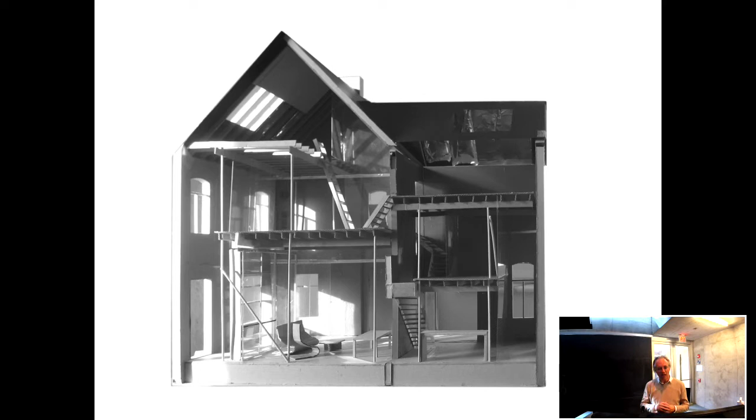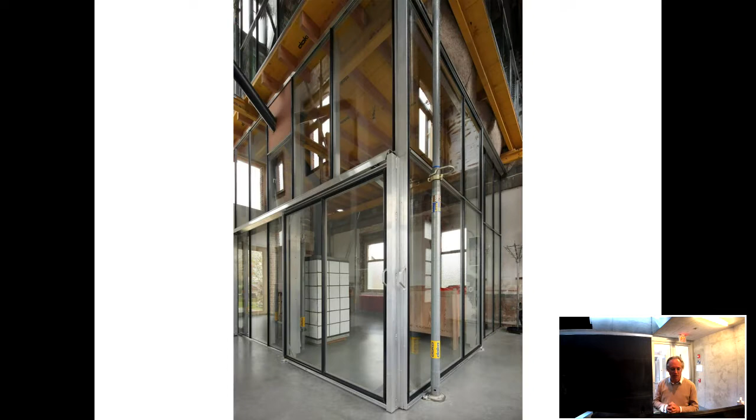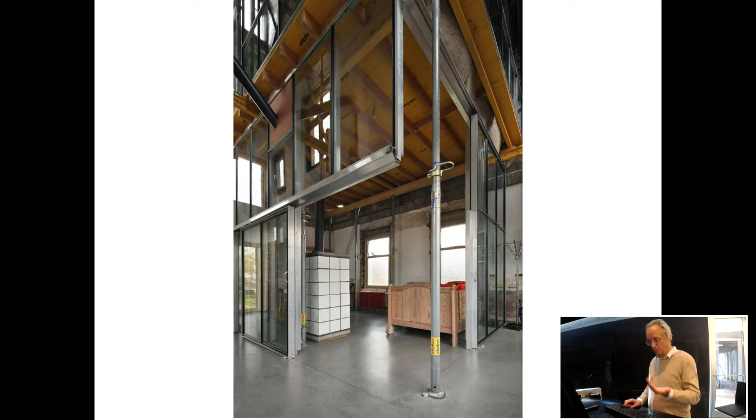It's also winter when you want to have more space or when you want to profit of the light around. This is the space. All existing floors have been taken out and a new glazed house came in between. What you see in between is in fact a huge, almost 1 meter space of air helping to change the climate of the house.

No insulation on the outside, but just the fact that there are two climates into the house. Of course this is very attractive to talk about nowadays, because we are all in this thinking of climate and sustainability, and we should be. But on the other hand, for us, the message is slightly different.

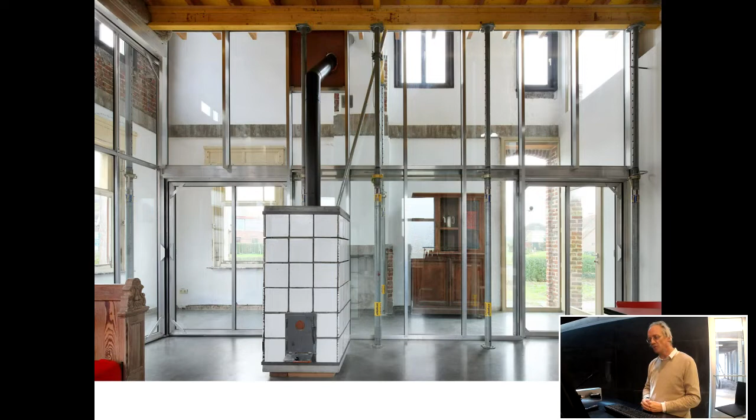We wanted to keep thinking about the idea of how to live in a house. This is the image I like to stand still with for a moment. One has a chimney. Maybe the chimney was not really needed, but at the end, in the winter, it's really nice. And the position of the chimney towards the old chimney is almost merely in my interest.

Instead of keep on repeating that it has its advantages in the way of climate, in the way of energy, and so on, for me it has mostly the advantage that it is another way of living in a house, and on top, a way of living in a house that could be built by the family themselves.

I show these images because for me, architecture is of course a message of form. We need to make things, to give things form, but at the same time, architecture is also a message of life. In the meantime, the kitchen has been changed without the architect, and I think it's a very good message in that sense.

But look what it is about. It's about living in it in a certain way, simple, decent, but everything available. We walk up to the bathroom, but there is something else in the house, and this image is a little bit unsharp, but it doesn't matter maybe.

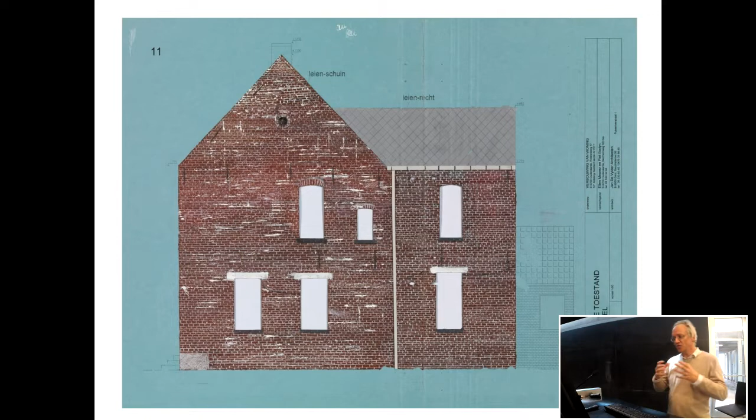It's about one facade of the house. As you've seen, the house is totally loose. The new glazed house is totally loose from the old house. But on one side, we needed to touch the outside facade, and then, of course, one has to insulate to do energy savings.

This is a drawing that represents, a little bit fuzzy, the photo from before, the image from before. And it represents the beauty of the old facade of brick layers, these old bricks that has been there for centuries, and walls that have been washed out a little bit, and the beauty of it.

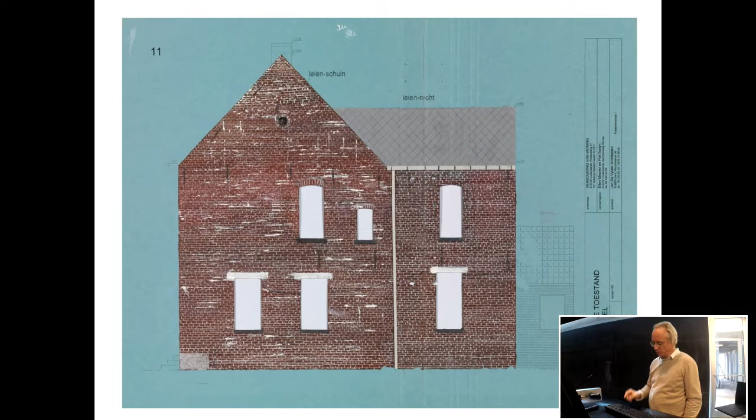Finally, we covered it with insulation, as we should do, but we covered it also with, in my opinion, nice cement tiles. But on those cement tiles, we added a drawing. Because with the client we talked, and of course one needs to have a good understanding with his clients.

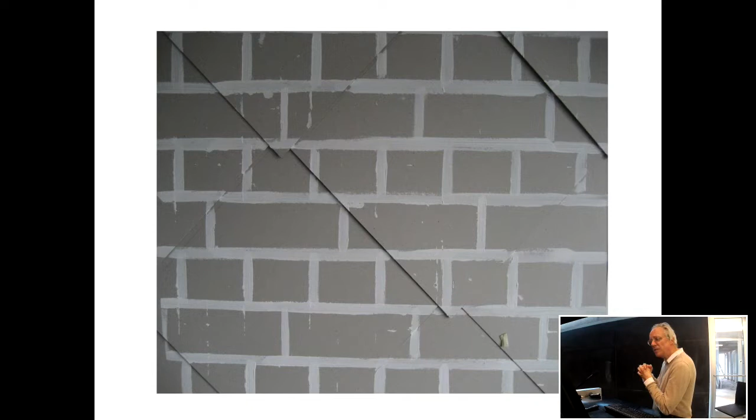With the clients we talked and we said, well, wouldn't it be nice that maybe next to all the things one has to do to create a house, we also might think about things that are not really necessary, but that are maybe about what architecture also could be.

And we together developed an idea of redrawing the idea of the brick wall on the tiles. What an effort for nothing. But to us, an addition to what architecture also could mean.

And of course, what you will see there, not everyone will see it. But then, the moment it comes into your eyes, it opens your thoughts. What's this? What is it about? Who has done it? What is the message? We believe that in architecture, and even especially in these days in life, we can rediscover meaningless things that at the end might mean a lot for a lot of people, and all in different ways.

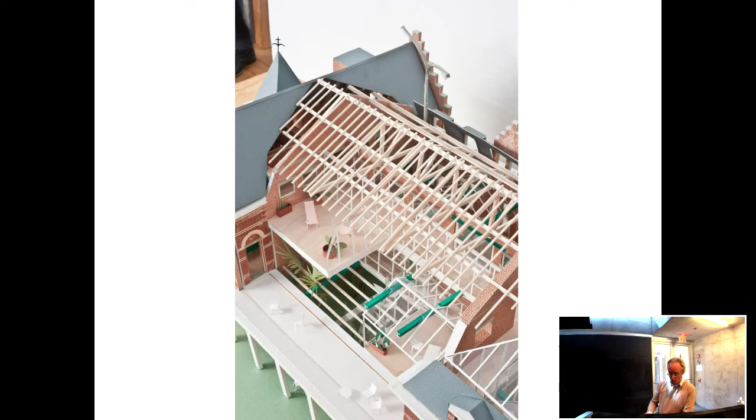And the model we used not only to explain the project, but also to explain our attitude by saying, listen, if we accept this job, or if you accept our proposal, we want to go for a long-term talk. Because at the end, your question was what can we do with the building? Advise us - if we can't do anything with it, then we demolish it. But the question had no program, no idea, and the question to us was how to react with the building, understanding that you were looking for new understandings of space and architecture.

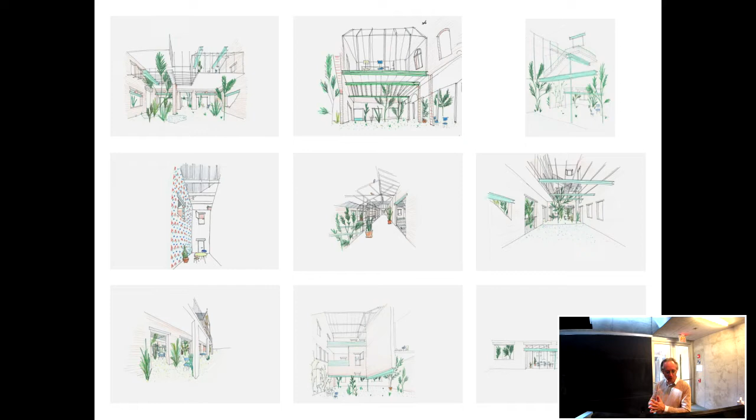And psychiatry. So we said, if you allow us to be your partner, we will serve you with models and drawings, explaining how space can evolve, talking not only with your doctors and therapists and practitioners, but maybe also with those who live there - to arrive at the idea that our participation in this competition will not deliver an endpoint, but becomes the start of a longer talk. Answer number two on a question that had not been raised.

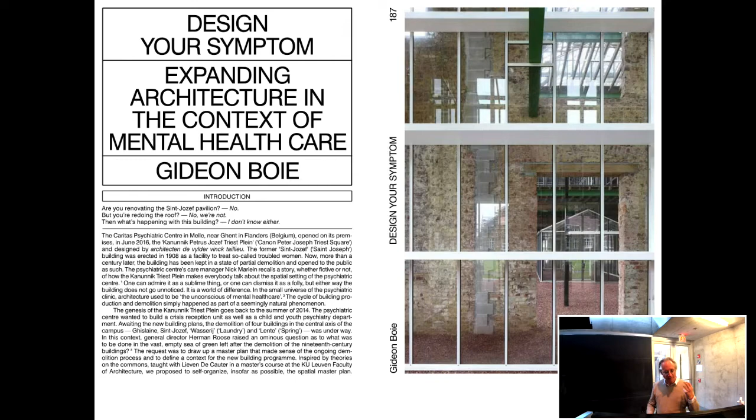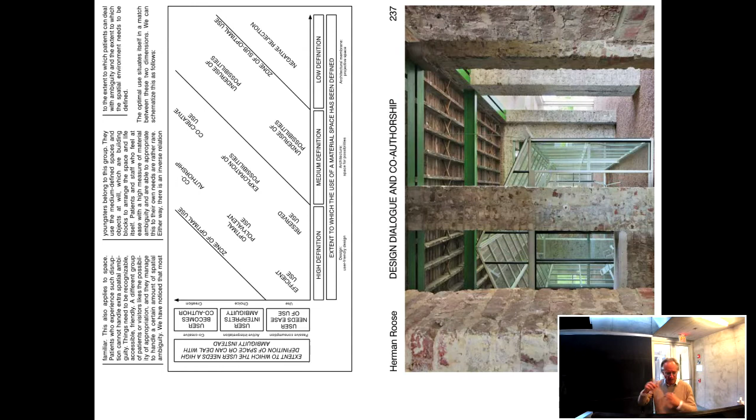That means there are comments on the projects, doubts about the projects included, structural ways of how you can realize something. There's the director's idea, but also comments from people who stayed there or doctors, included in the book. For us as an architecture practice, you're used to making books about architecture pur sang, celebrating it from beginning to end, whole philosophies on architecture as such. But here it's about the use of the building, about the idea of the future use of the building, and what psychiatry and space can do.

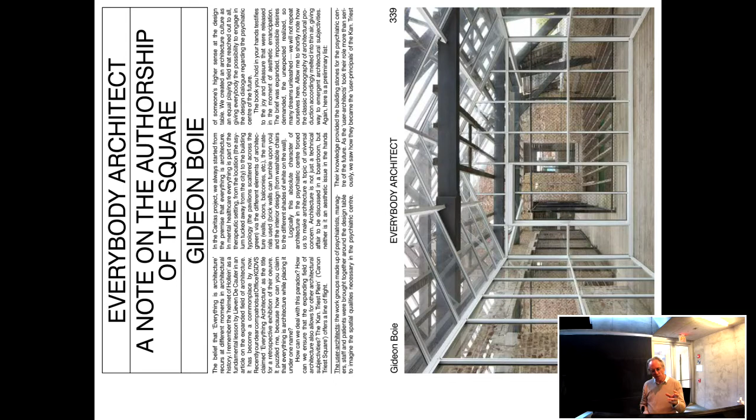I'm not going into detail, but I believe when we talk about the Venice Biennale, to me the booklet is more important than the exhibition.

In fact, there was, until then, a very perverse system of subsidy - you could get 100% subsidy for your new hospital building, but never for the renovation of an old one, if the renovation was more expensive than 70% of the cost price of a new one. That's one of the reasons why in the 60s, 70s, 80s, all those buildings disappeared so quickly, because the architects were clever enough to explain to the Sisters of Mercy that it was almost impossible to adapt them to regulations, but also to adapt them to budgets.

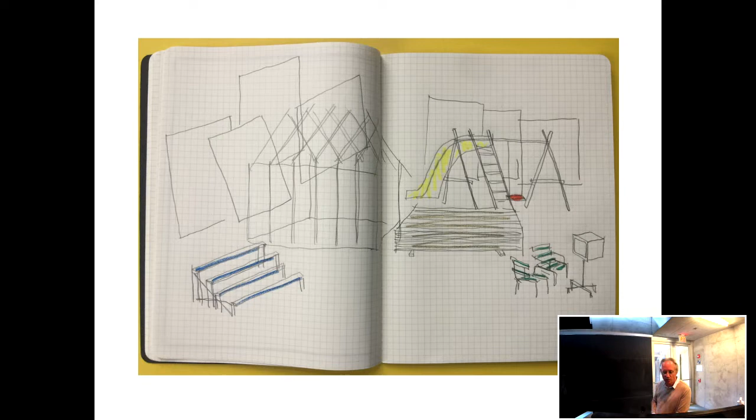The people here are happy. Why not? Nowadays, we are still in contact. We still talk, make first sketches and new drawings on how we will change the building soon. We will move a greenhouse outside, as they wish to have one on the green grass field. On the other hand, they'd also like more free space on the ground floor. We listen, we suggest, we talk. Slowly, things will change soon.

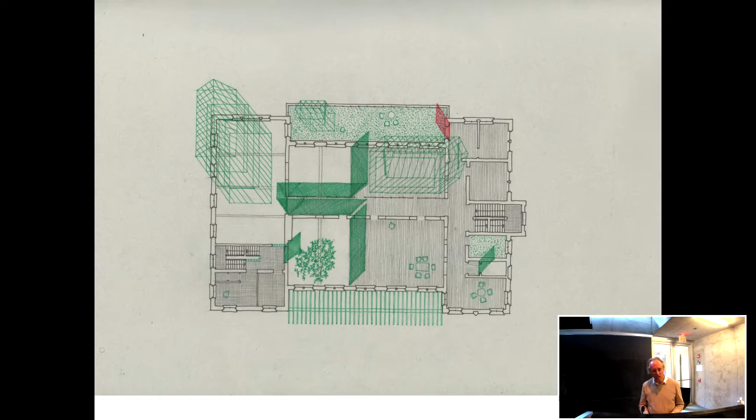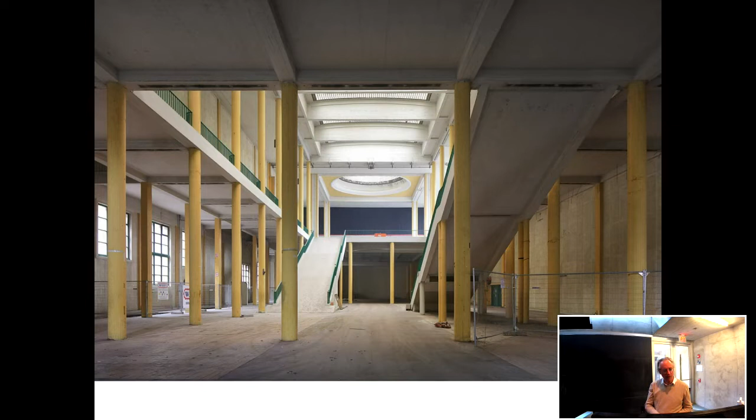This is the middle lobby space, pure concrete. The colors are fake - they were added at a certain decade. No one knows the story; it has nothing to do with Sottsass or whatever, it's not original at all. But look at the beautiful glazed roof parts above. This is how we found it.

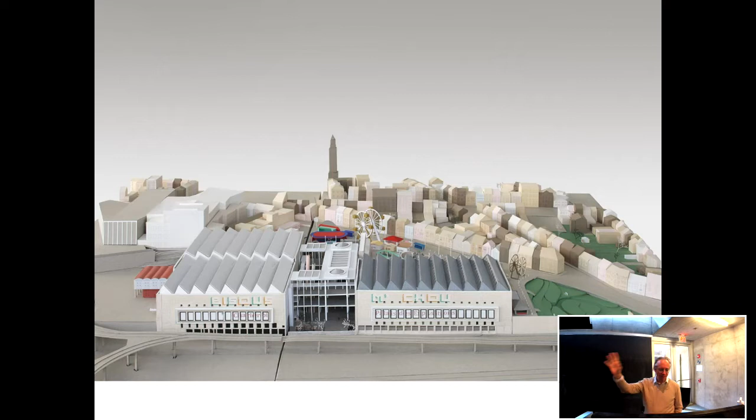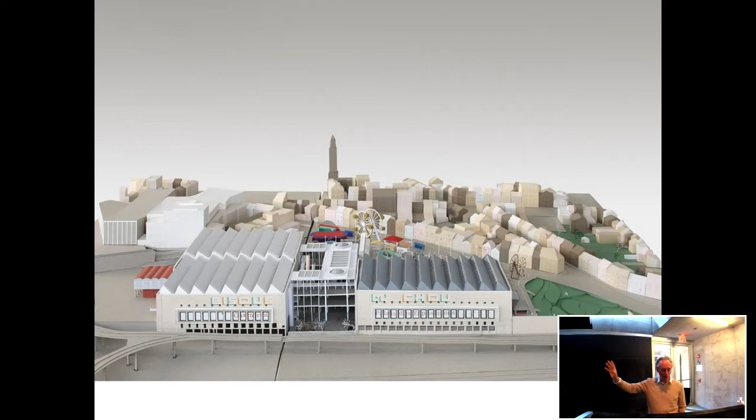On the left side, by that we gained a lot of money. We only needed one-third of the foreseen money to make that come through, and we saved two-thirds to technically upgrade the other parts of the building. So on the left side, where there was no money foreseen, we now have asbestos-free roofs, insulated, all new techniques - basically what you need to make an exhibition space out of it. On the right side, it's a parking building.

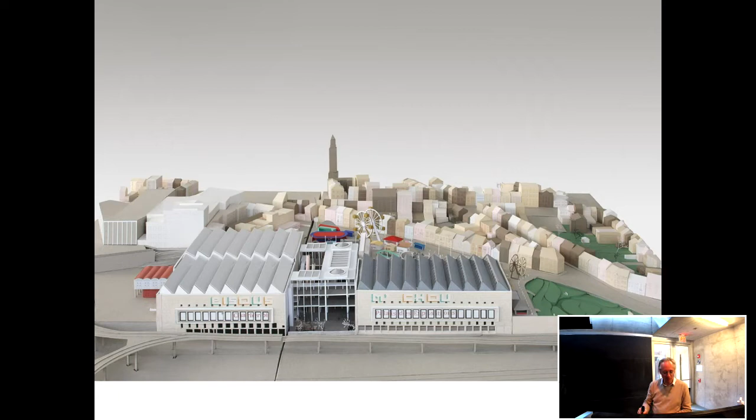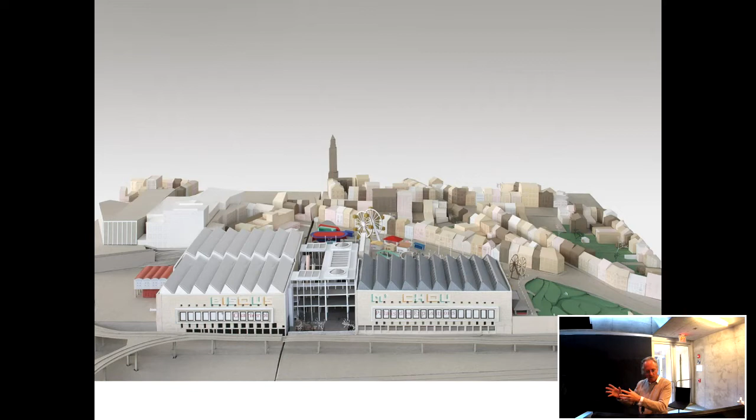It was foreseen, they asked in the competition to dig out another level underneath for a parking building, which was crazy because we said also in our competition entry, you will never use again the 66,000 square meters. So what's all this need? Make a parking building on the side, that very moment you might need it, 10 days each year. You just rent plastic tents with climatization, but that cost does not weigh up to digging out and so on. So our proposal was one of economy, of strategy, of politics.

It was over the summer we made this competition, and we were very sharp, very sure about what we proposed. But on the other hand, of course, we knew that we did not fulfill any demand of the competition.

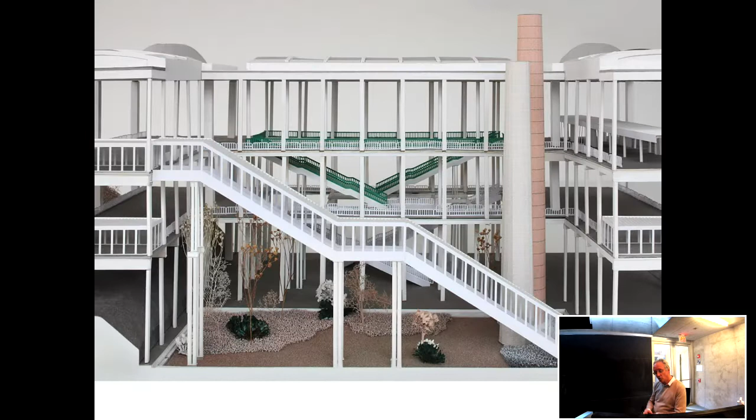Totally unexpected, we won it. We knew after that also, and we thank the local government for that, they did everything to make this in a juridical way acceptable.

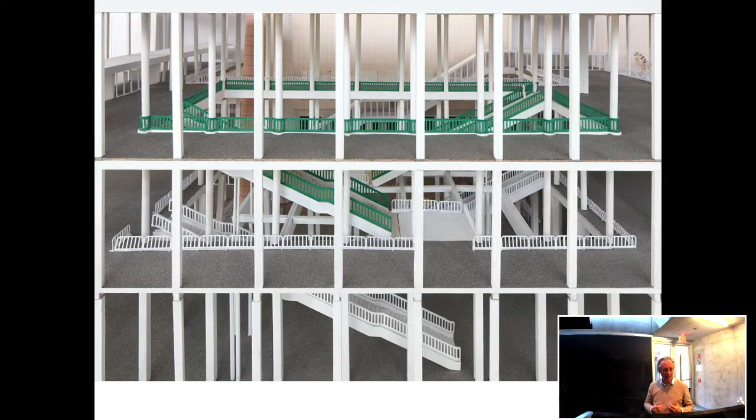This is, I believe, what or where it should be about. And there I dare to bring Francis Alys's quote on politics and poetics here, because I believe architecture, we have arrived, and I think hopefully even more after what happens now over the world, we are right at the moment that we should be daring to get us more involved in strategy, politics, daring to be critical towards the questions that are raised to us.

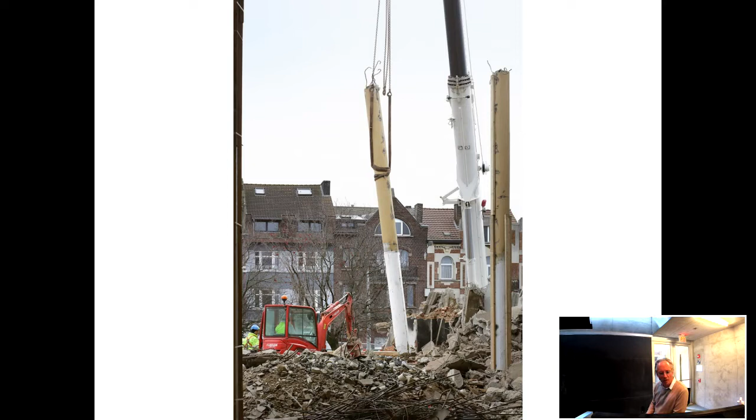Anyway, today it's a pleasure. The project is made together with Aura Architects from Brussels and with Doors on Interieur Architecten. And for example, yes, we also demolish parts, but the old columns will be collected and used as benches. We take care of everything at that site.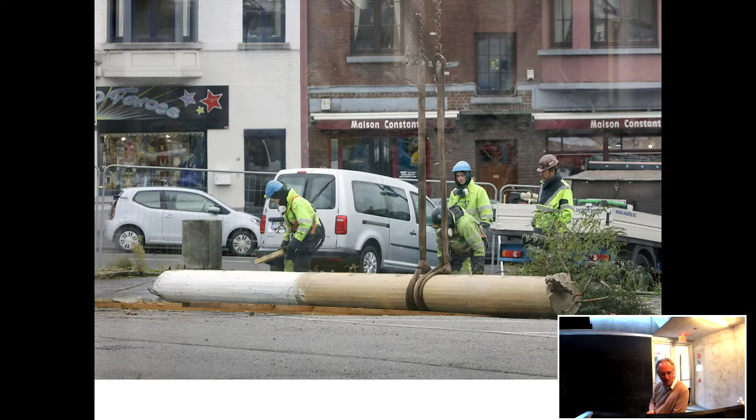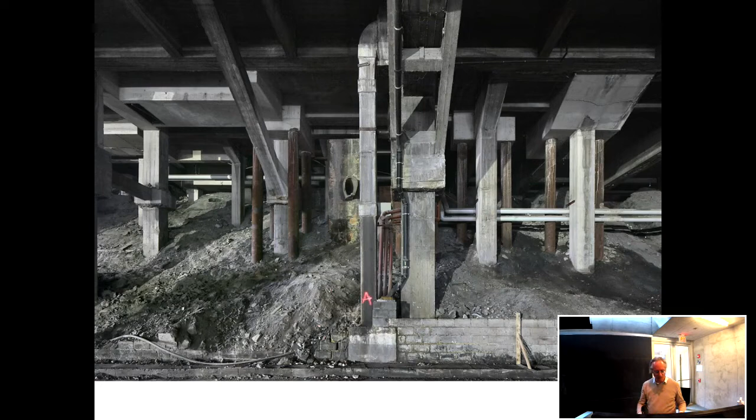But at this moment, with the same budget which was only foreseen to realize architecture, and maybe at a certain point we realize architecture also, but not by wanting it to realize as an addition or whatever. Still, we are puzzled today on the building site, and we find zones in the building. This is not a Philippe Dujardin collage, he would have wished, but this is the structure of the building.

We expect to be ready within 2 years, and then there will be a new park and connection added in the city that connects the upper and lower city.

This is a work of Flemish-Swiss artist Ante Timmermans, mostly Flemish I have to say. It's about a project I would like to explain. It's again not a project of our office. I mean, the image is about the competition in which he was involved. But his proposal, he named it Mettre en jeu, op het spel zetten. Difficult to translate in English, I would say, dare to take risks.

The title of this lecture is that it does not look good makes that it looks good.

It were those years, Caritas, Charleroi, all those projects came to us and pushed us back in the way we were thinking and forced us to change our approach. There was a small job, it was called a pavilion. We were invited to make a pavilion in a park on the occasion of a festival of art and music. This is a sample of a small pavilion as we made it. This is the pavilion.

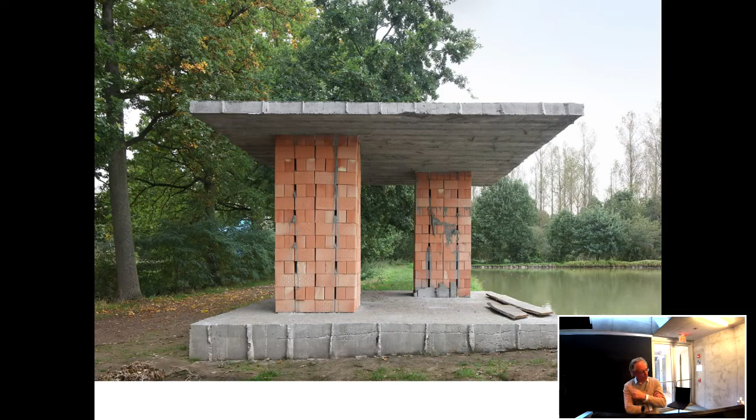What is a pavilion? You know, a pavilion mostly comes at a time it wants to represent a kind of optimism, a kind of new technology, a kind of new era. It has a lot of messages. It is top, it is what pavilions always are. Mostly also to be demolished after, what exactly happened with this pavilion, though it was not meant to.

But anyway, what happens? We made a pavilion, and we were maybe at that moment a little bit, I don't know exactly what the psychology was of our mind, but we were a little bit bored with this idea of making it the best. And we said, let's do some things one should not do, or what we should not do. And you see a basement in concrete. It has been given formwork with planks as they are still there, benches we made later out of them. And those planks, yeah, they lead to this kind of rough concrete.

It's not well done. Then we stacked blocks, not even in bond. We called the engineer and asked for some armature in it, reinforcement, and then we poured concrete from above. We made a kind of roof out of concrete.

There's no finishing on top, and we asked the engineer to decrease the amount of armature in it so that after a while it would bend a little bit and let the water flow away in a natural way. The outcome of the concrete we poured and cast is what it is.

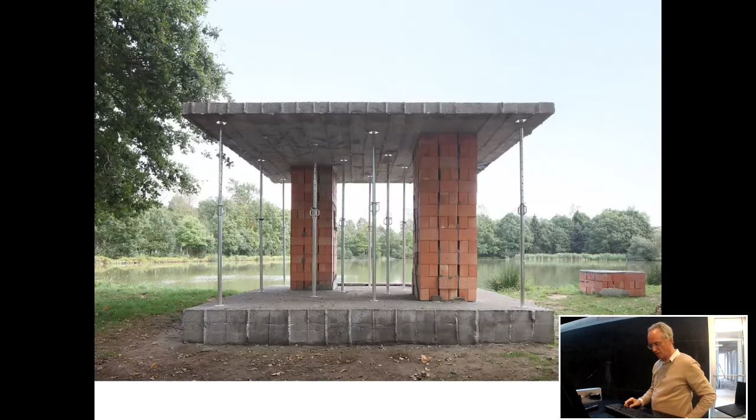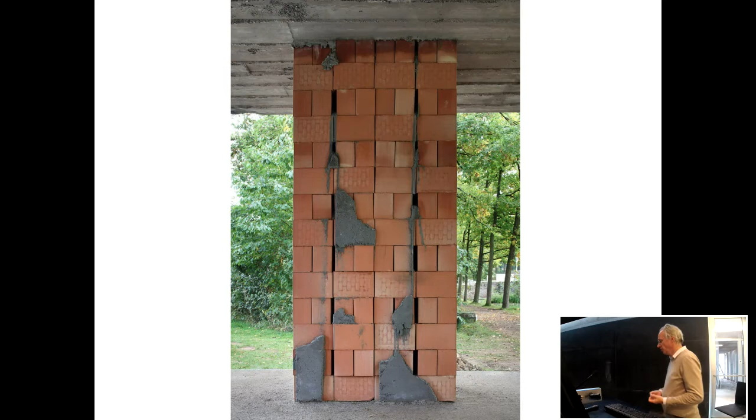This was an earlier stage, at the opening, as it was still not ready. But the message was what you see here. It became a conglomerate. I don't think making a conglomerate is a really architectural gesture, but at the end, it stood there, strong.

Ecologists loved it. They said bats, insects, everything can go in. The Sunday traveler or visitor said ugly, let's forget about it, it should be demolished. But for us, it turned out to be something opposite to how we daily take care of details. We did take care of details, but at least it confronted us again in the way we approach things.

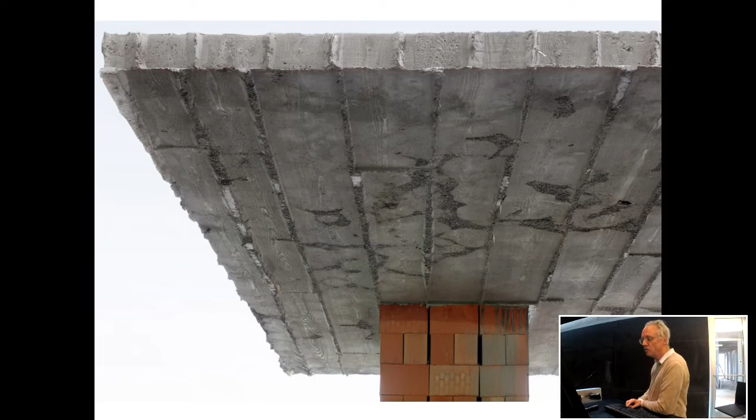A philosopher, an architectural critic, came and said 'mess.' I said, okay, mess, if you wish. But somehow this pavilion became maybe not the expression of the huge optimism of technology and the future. To me, it was an expression of the optimism of the basic, the direct way of making things. I still don't know exactly what I should think about it, but at the end, it's got this title: that it does not look good makes that it looks good. At least to me, it looks not too bad.

The commission came from the Agency for Nature and Forests in Flanders, and this commissioner was also the one who had to give the building permit. They made a mistake. To avoid any small political scandal, they demolished the pavilion, from one day to the other, once they understood they'd made a building permit mistake. Well, that's what should happen with pavilions.

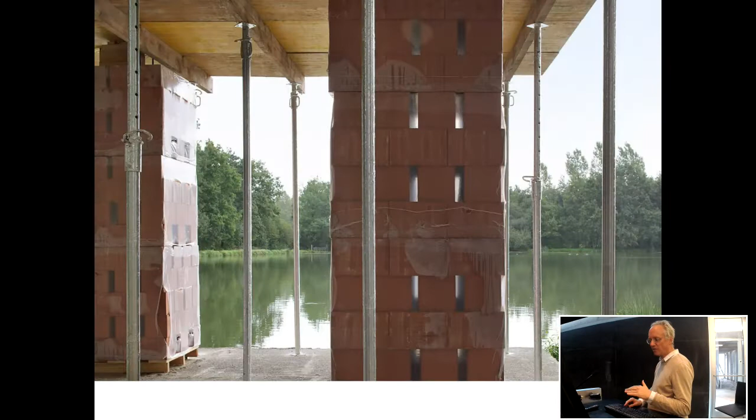It didn't stand longer than half a year, but a year after, the festival was there again, and the curators asked us whether we could rebuild it. We said maybe we don't rebuild it again, let's make a reenactment. Well, irony, why not? Still today, the only thing left over is the concrete plate, and it seems no one is taking the effort to take that away.

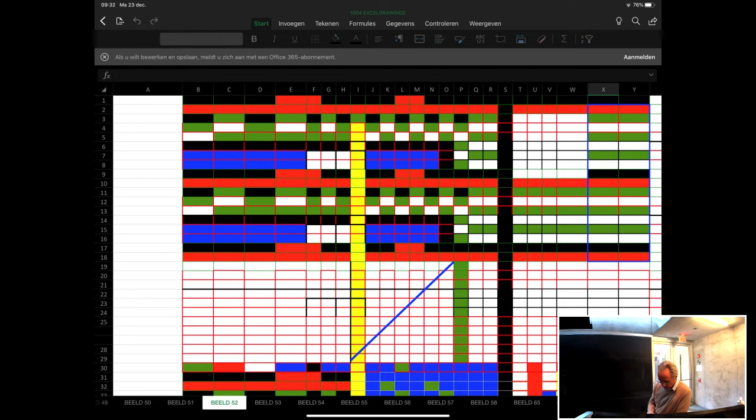Maybe now I'd like to introduce, just as a wave out, at the time of today, some side things, the so-called whatever things we are working on. I'm happy to show you some things which maybe we should experience more today. Those are drawings we made on the occasion of boredom. We didn't know what to do, we were on the airplane, we were at home in the evening, we don't have television.

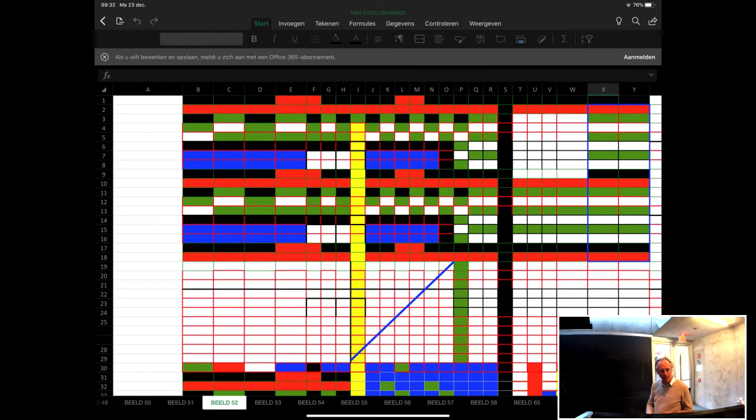We got a little bit bored and we made drawings. Those drawings are called the Excel sheet drawings. We had a lot of them, and we even started with some collaborators to make more. We have hundreds of them by now. But to me, this idea of making them has to do with the fact that this is a calculation sheet, an Excel sheet, but we use it in a totally different way.

We were astonished that it was picked up so soon. Some art bookmakers, a new magazine called Gallery Magazine, in combination with Art Paper Editions, made a book out of it. We love that our first architecture book has nothing to do with architecture, but has to do with the ambition, or the love, to go beyond and find ways to use things differently.

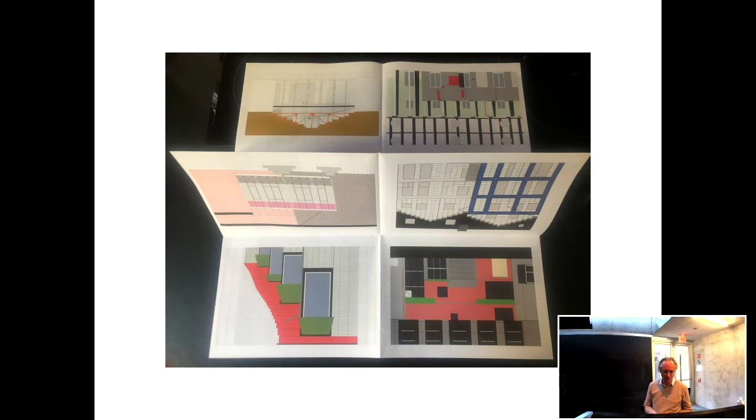Finally, Inge, who at the end is maybe more responsible for these kinds of free drawings, restarted to redraw projects we made. It's also included in a booklet. And later on, we will find in Ghent huge flags. This is a collage of a 55 square meter tall flag, and all over the city the flags will be available for a moment.

But for me, I show it today because I think for everyone locked down, let's just do some things which have to do with boredom. Let's do some things we never should have done before. Let's do it and just enjoy it.

This Excel sheet mania will even deliver us a new website soon. I won't go into detail, but it's of course a very practical instrument to order thoughts and things.

Secondly, maybe really do stupid things and let's communicate them in the days coming. This is a longer or shorter version of a longer reportage on Instagram, about sharpening the pencils. Only that. Let's do stupid things in the days that come and see what comes out of it. I won't show them all.

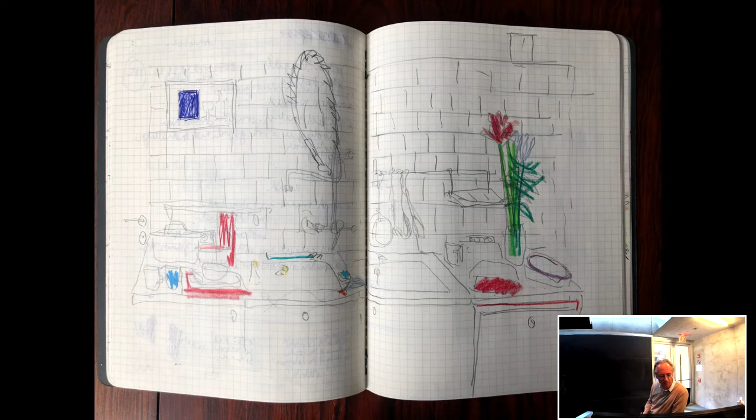I will switch soon to the backside, to maybe why they needed to be sharpened. I'm looking forward to finding days and afternoons to make drawings of my context around me, the kitchen space, and move on with the kitchen space.